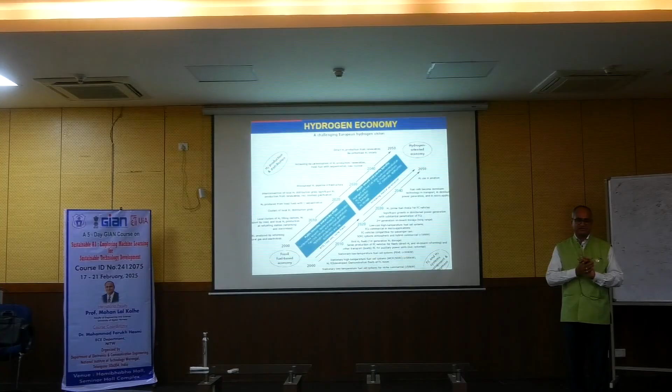With reference to what we were talking about, the hydrogen economy, we have to understand that all the engineering domain knowledge we are studying, we want to integrate for our sustainable development. We have seen that by 2050, most developed countries want to be carbon neutral. So to become carbon neutral, to have a decarbonized hydrogen society, we need to replace hydrocarbons by using hydrogen energy. That is a very interesting point.

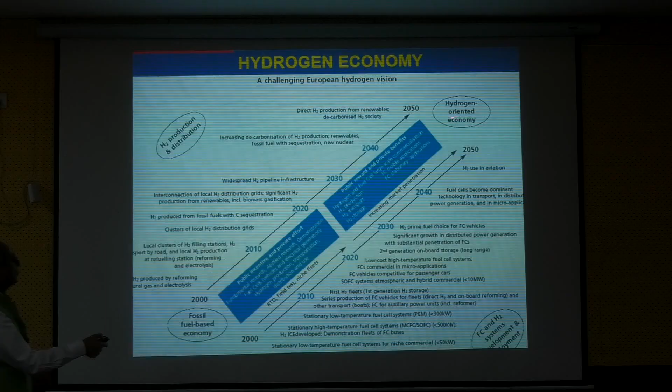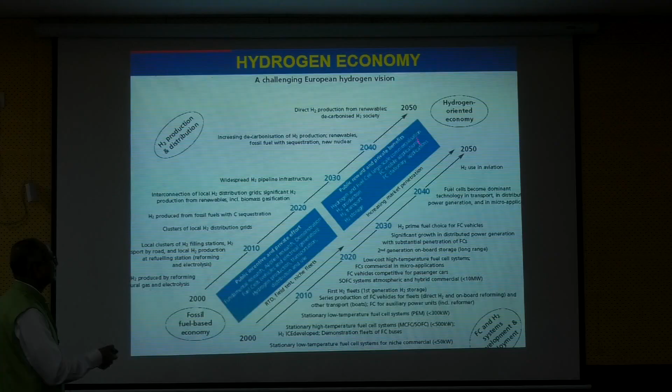We want to move towards a hydrogen-oriented economy, and this hydrogen comes from renewable energy sources. At this moment, let's say we are somewhere here with a fossil fuel based economy, and slowly we are moving to replace this using clean energy technology. At 2030, most countries have agreed that we have to increase our renewable capacity by three times. So we need more sustainable technologies, and they are going to contribute for the decarbonized society through hydrogen, as we were discussing in the last lecture. Now you might have a high level overview of why this is important from the engineering perspective, considering the multidisciplinary perspective, when we want to move towards the hydrogen-oriented economy for a decarbonized hydrogen society.

Very shortly, what we discussed in the last class about the algorithm, I am going to present that algorithm which was in real operation.

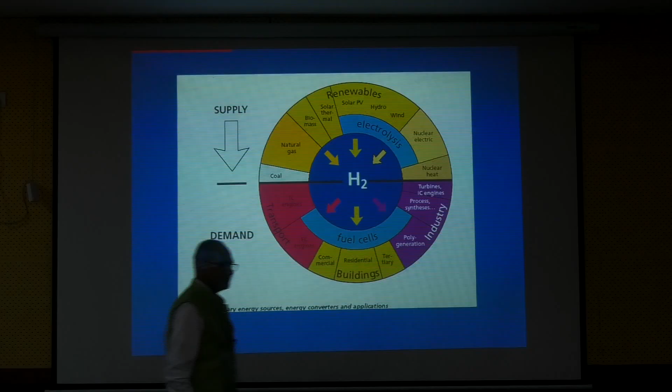This is again a very high level information, and I want to continue yesterday's lecture today also, so you can have a good idea in integrating the domain knowledge. In yesterday's lecture, we focused on making hydrogen an energy carrier. At this moment, our hydrogen is mainly coming from this process: hydrocarbon reforming is contributing significantly for hydrogen production at this moment, around 95% of hydrogen is coming from hydrocarbon reforming. But in the previous slide, we saw that we want to make our society decarbonized. To make it decarbonized, we have to replace the hydrocarbon, and hydrogen can be a good energy carrier.

But now we are participating in a course focusing on sustainable technology development. Of course we are trying to learn about machine learning implementation, but first we have to see how these technology developments are happening. To get hydrogen from clean energy sources, those are renewables: solar photovoltaic, hydropower, wind. These are used through the electrolysis process to get electrolytic hydrogen. When using these sources, we do not have any hydrocarbon contribution, so it contributes very effectively towards a zero carbon society. At the same time, in some countries they have nuclear electricity, and that can also be used, along with the heat taken as a byproduct from the nuclear power plant, or maybe solar thermal, for reforming biomass. Overall, the objective, as discussed in the last lecture, is making hydrogen an energy carrier.

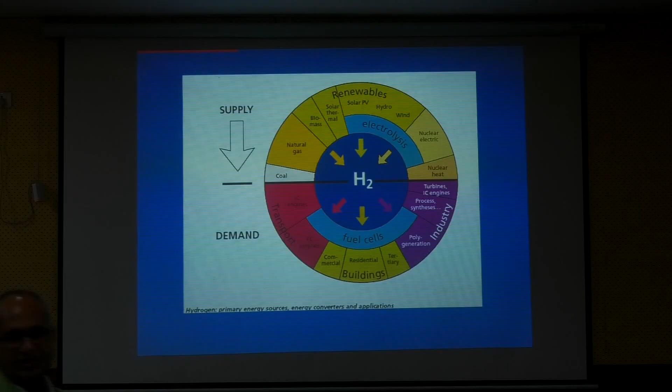We can use hydrogen with some slight modification in internal combustion engines. This is a very interesting point from the engineering domain knowledge perspective. We know that most of our transport sector is based on internal combustion engines using petrol and diesel, which contribute significantly to CO2 emissions. We have to reduce that, and we have to use engineering knowledge for that. With some modification to the internal combustion engine, we can use hydrogen as a fuel.

Last year, I had the opportunity to participate in the European Union Hydrogen Week at Brussels, Belgium, and what I observed is that most of the leading automobile manufacturers of heavy duty vehicles, like Scania, Volvo, and all these big trucks, are modifying their internal combustion engines so they can use hydrogen fuel. So now you see how some points we discussed yesterday are going to be implemented in cooperation with the industry.

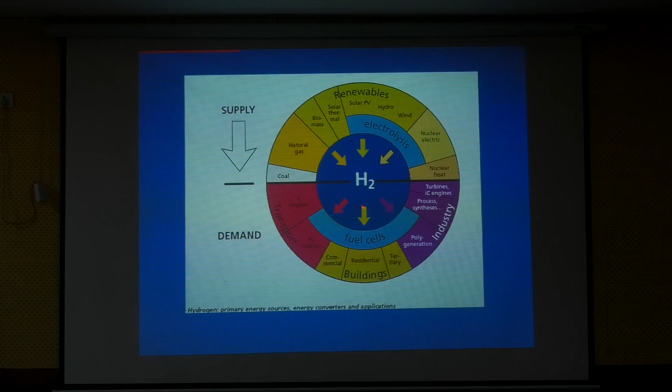Now the next point here - I showed transport sector, but another very interesting point we will focus on is the fuel cell. Many of you are already aware about this electrochemical reaction in fuel cells, and these fuel cells can be used for many applications: transport, stationary application in buildings, and also in industry. Now we will come very soon to the algorithm also.

What I was mentioning yesterday - hydrogen is going to be required mainly for the process industries also. Why? Because we are going to require fertilizers, and fertilizers require ammonia, and for production of ammonia we need hydrogen. So for our sustainability and for our next generation, we need sustainable food, and to get sustainable food we need fertilizers, and for fertilizer we need ammonia, and we can get the green hydrogen through this electrolysis process. So you see how all the things are integrated with each other.

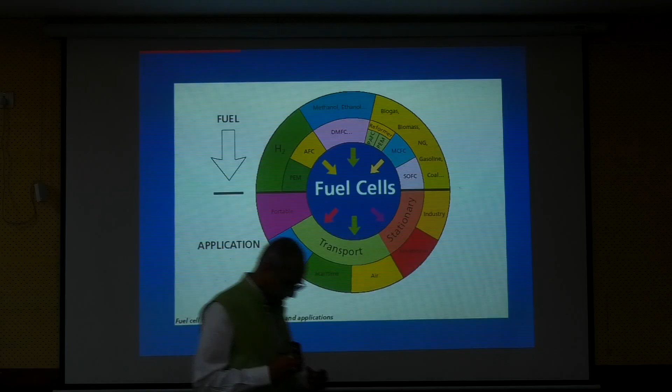This picture provides you some idea about the supply of hydrogen and the demand. If we go to the previous slide, this IC engine technology is a well established technology. Similarly, process industries are also well established technology, but fuel cells are not a well established technology. So how fuel cells are going to contribute in different applications of sustainable technology development, and how we have to control them or use available data for autonomous operation of such systems - that is what we are going to focus on today.

So let's say for your assignment or exercises, if I give you a task to develop an algorithm for such type of systems, I believe that after this lecture you will be in a position to provide me a flow chart of the algorithm. I know we can do a lot of programming, but if you can make a flow chart based on your thinking on paper, that will also be quite good and good learning.

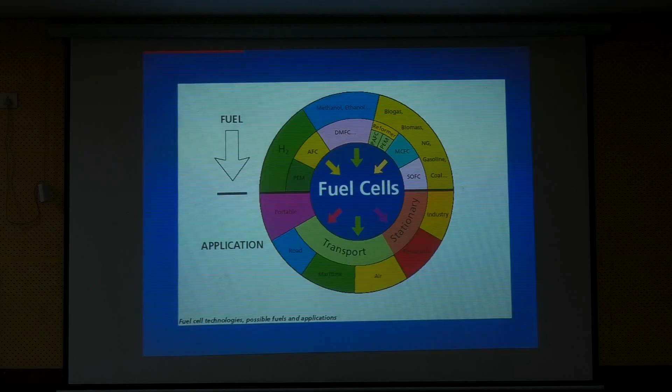Coming back to fuel cells, they can be used in different applications: portable, transport, stationary, and so on. In the transport sector, I mentioned briefly about road, but there's also the maritime sector and the aviation sector. There is big potential here. This was just a high-level overview.

Now coming back to the problems which we are going to face and how we can use our knowledge for that. We have seen how hydrogen is produced, how it's delivered, how it's stored, which type of fuel cells are available, and when we want to integrate them, what type of control algorithms are required. For that we need research and development, and only then can we do technology validation.

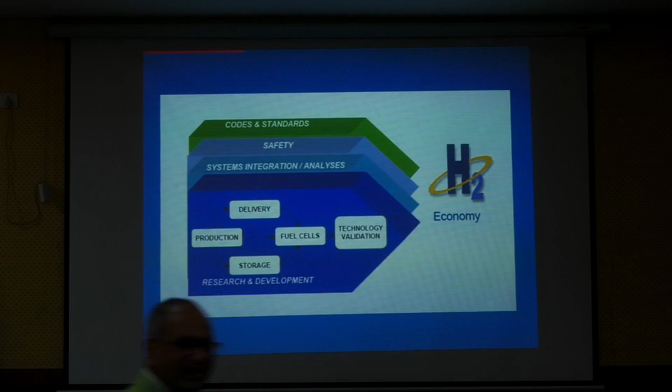Being researchers, you have the opportunity to utilize your domain knowledge if you want to contribute towards the hydrogen economy, maybe in hydrogen production, for example. In green hydrogen production, meaning getting energy from renewable energy sources, you need prediction techniques to estimate how much renewable energy production, maybe from wind turbines or solar photovoltaic systems, is going to be there. Based on the electrochemical characteristics of the electrolyzer, which can be physics-based modeling combined with prediction modeling, you can get an idea about hydrogen production.

I will share with you some papers about the prediction of solar and wind energy. Many of my students worked on this, and in those papers the algorithms and equations are there for you to use. If we put the modeling of the electrolyzer on top of that, we get an idea of how much hydrogen production is going to be there. This shows how you can contribute your engineering knowledge to understanding hydrogen production, which is very important for policy work or planning.

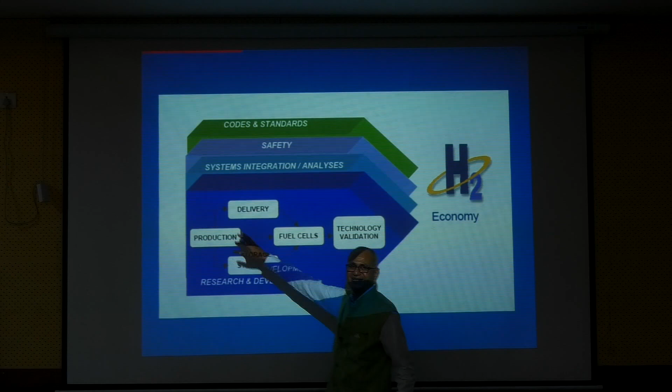After getting an idea of production, we have to see at what rate it's going to be produced. Accordingly, we determine how we're going to store it, how we're going to deliver it, where the application is going to be, and then do the technology validation. Here you can see such a system.

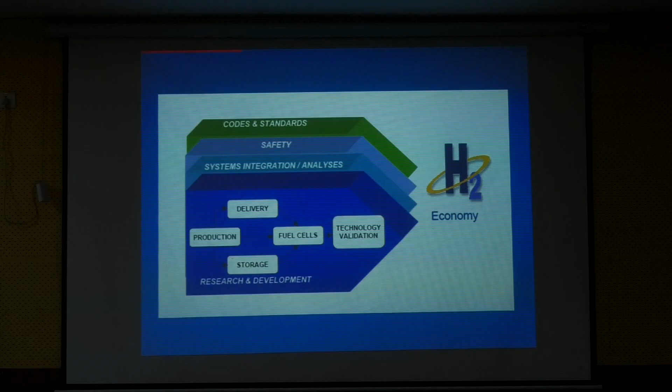When we talk about system integration, different types of electronic components or power conditioning devices will be required. So here you can use your knowledge. Let's say some of you are from an electronics background - you can develop power conditioning devices for specific applications, because for every application the device components we need to design are going to be very different, as I will explain. Your electronic engineering knowledge can be useful for designing system components when we want to do the integration.

Yesterday we discussed safety also, because hydrogen is highly flammable and we have to be very careful. So safety is important, and on top of that we always need standards and codes. Without that we cannot work, right? There are always some standards.

So the codes and standards, then only we can move towards the hydrogen economy. If we are planning to make our society decarbonized by 2050, and we are now in 2025, next 25 years are remaining, there will be a huge number of requirements for engineers who can contribute towards the decarbonized society. So while teaching your students, you have to focus on how the big requirement of engineering professionals for the next 25 years is going to be there, and in which domain.

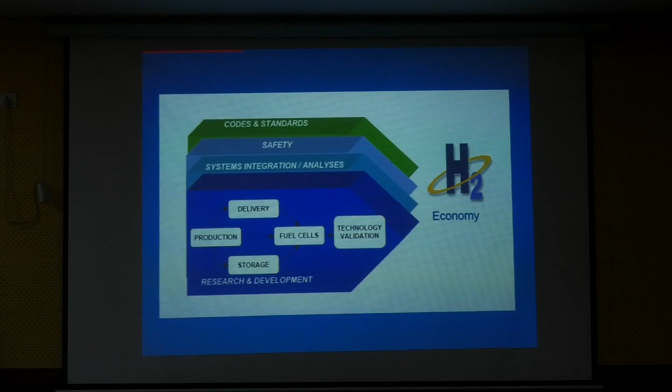That is true. So now you got a little bit of a high level overview about the hydrogen economy and how we can contribute. Now I am going to give you a very specific case about an algorithm, and how that algorithm was developed by me and my team 25 years ago. This is a very interesting and real operational work.

Here you can see that we are integrating renewable energy sources with what objective? With the objective to store the energy in the form of electrolytic hydrogen. It means hydrogen is going to work as an energy carrier. So here I am going to share my experience of working on this project.

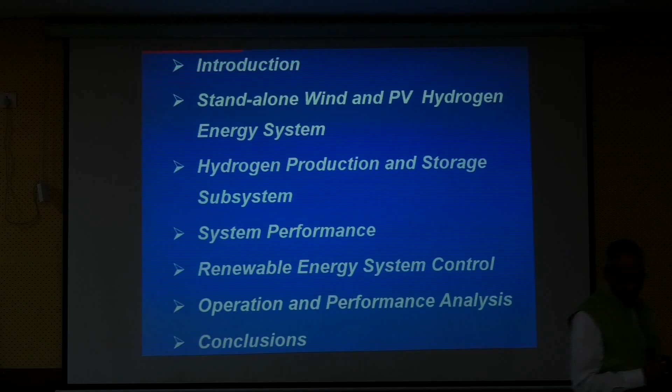I was the lead in this project. We developed two projects of the same kind: one was in Canada and one was in Finland. So in this project, the idea was to use wind turbine and solar photovoltaic sustainable energy technologies.

for storing the energy from these sources in the form of electrolytic hydrogen. We wanted to have such a system that is autonomous and standalone, and for that, how do we need appropriate power conditioning devices and algorithms, and of course the data which we have collected or are going to collect, and how that data can be used for further analysis.

So I am going to present how these renewable energy systems have been integrated with the objective of hydrogen production and storing. And I missed one point, that should be hydrogen utilization also. And then when we are integrating all this system, how it is going to perform based on the control system or algorithm developed and implemented for its operation, followed by operation and performance analysis, and then of course I am going to provide you the conclusion.

This is a very interesting project, and I feel very happy that I did this work maybe around 25 years before, and now we have seen in this hydrogen economy slide that by 2050 our fossil fuel based economy is going to be replaced with a hydrogen based economy. So some of the outcomes from this project are going to be useful for that. I feel very glad that the work me and my team did 25 years before is going to make a significant contribution now.

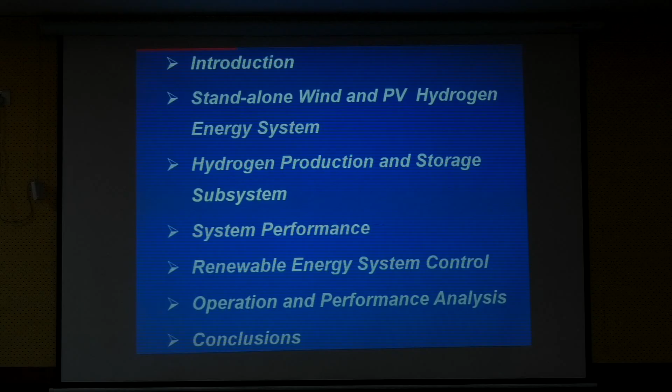Now, the question in your mind may come that we want to store the energy in the form of electrolytic hydrogen, but we can use a battery bank also. So compared to a battery bank, storing the energy in the form of electrolytic hydrogen is going to be more complex than a conventional battery system. That is true.

So what advantages are we going to get? We know that most of the technologies are available in the market, but the big challenge is how we are going to integrate them for such a type of system.

When we want to integrate them in such a system, the expertise of electronic engineering, power engineering, and computer engineering is required, because we need intelligent power conditioning devices which can help us overcome the intermittency or integrate components which have different operational characteristics.

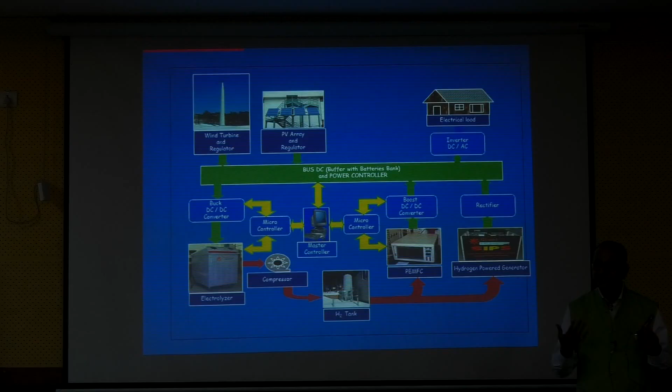So because this was a demonstration project, whenever we want to do the research, we always have to see how we are going to demonstrate the technology and the work to the stakeholders also, which may be general public, policymakers, professional engineers, those who are working on energy policy also, so they can give the idea. They can suppose this type of pilot system is working, then how we can think from the bigger picture.

So that was also the objective behind it, not only to do the academic research in the lab, but to engage the stakeholders and common public, or industries also, so that they can get the knowledge and information of such things, and then accordingly they can think to develop the industry's policy implementation.

Now here this electrolyzer, it was an alkaline electrolyzer. That is again a very important point. I'm not sure how many of you are aware about the different types of electrolyzer. So this is an alkaline electrolyzer, which is a very well established technology, widely used from country to country. This alkaline electrolyzer always needs constant power. Always.

But now technology is changing, market dynamics are changing, new renewable intermittent technologies are coming. So further research work and demonstration work is happening to replace this alkaline electrolyzer by using proton membrane electrolyzer. Some of my students did the work on proton membrane electrolyzer, and that fits very well with the smart grid. I will explain how it is going to fit with the smart grid, because we are trying to use this machine learning for sustainability.

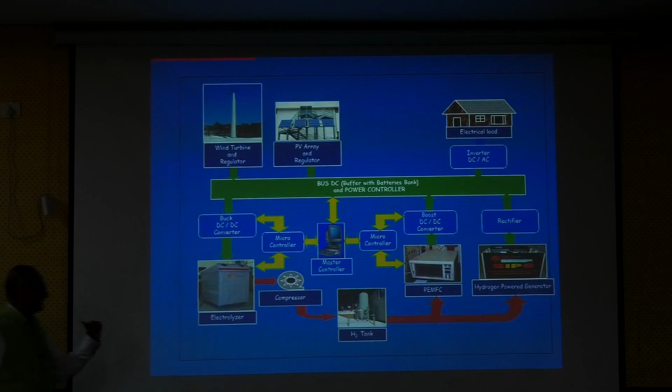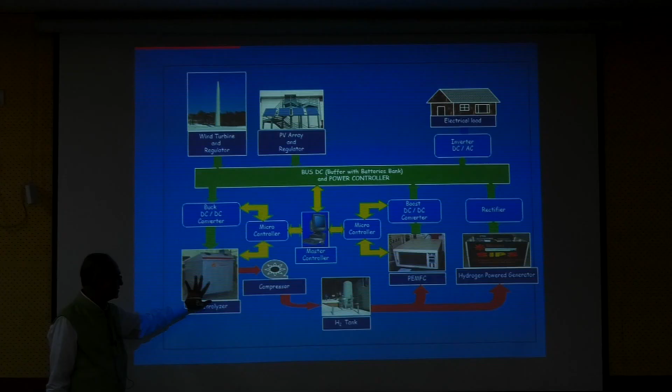So before the break, when we talked about this alkaline electrolyzer which needs to have a constant power supply, but in future, due to the advancement in technology and due to the technical challenges which our network is facing due to the intermittent renewable energy sources, this system component is going to be replaced by using proton exchange membrane electrolyzer. This proton exchange membrane electrolyzer, in place of alkaline, will be in a position to operate under intermittent power supply also. Now here I will put that point with reference to the smart grid.

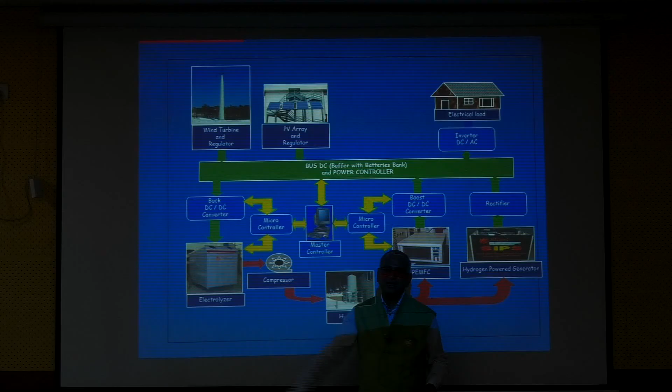In smart grid we are trying to integrate information communication technology together, and also doing the demand side management and energy efficiency. In that condition, if we are going to put in place of alkaline electrolyzer a proton exchange membrane electrolyzer, then that modeling of the proton exchange membrane electrolyzer is going to be very useful for finding out the opportunities for demand side management and conditionally transferring that intermittent renewable energy for producing the electrolytic hydrogen.

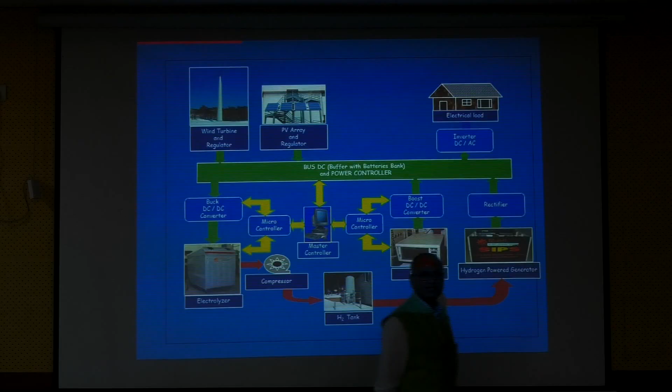Now, we know that this alkaline electrolyzer is operating at atmospheric pressure. When there is a buffer storage tank here, and this buffer storage tank is full, then this compressor starts and compresses the hydrogen at a particular pressure and stores it.

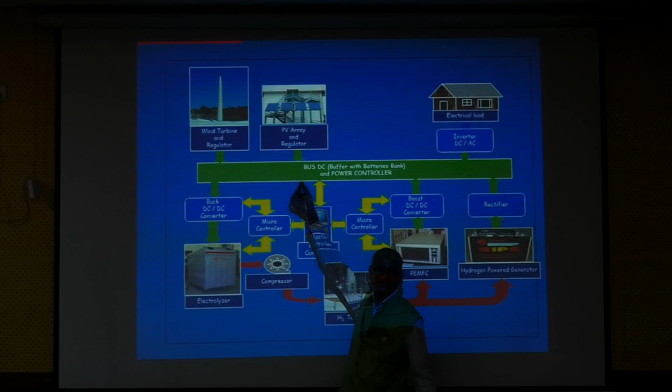The question will come in your mind that this compressor is also going to require energy. That energy is again going to come from the DC bus, and therefore the energy level at the DC bus is going to be fluctuating.

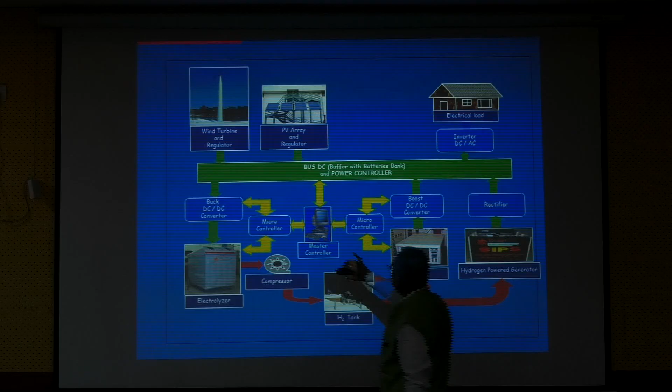It means that the master controller is getting dynamic data with reference to what? With reference to the changing energy level at the DC bus, not only with the consumption of energy into the electrolyzer, but also the consumption of energy into the compressor. At the same time, this master controller is having real time data on wind and solar photovoltaic production, and on the electrical load as well.

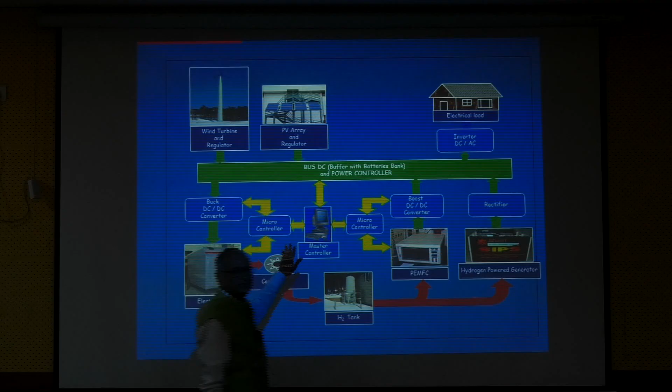This master controller has the duty to predict the wind and photovoltaic production for the next couple of hours, as well as the requirement of the electrical load. Based on that, this master controller can make some decisions, okay, how the energy level at the DC bus is going to change and how the hydrogen production is going to be there.

Now here you can see the beauty of how we are going to integrate prediction techniques in the operation of such a sustainable energy system, in which we want to make it completely carbon neutral from the process point of view.

So it means that the input is carbon neutral. Of course, for the production of those equipment there may be some carbon process also, but we are not talking about the life cycle process. We are talking only from the operation process point of view.

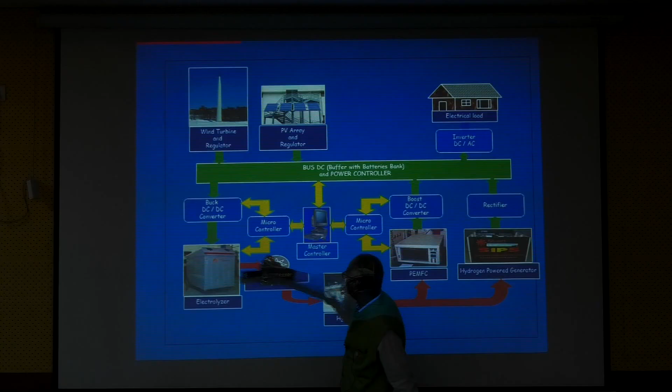So from the operation process point of view, taking a typical example of this one, you can see how this machine learning based prediction technique, which we need to implement here and here, and then getting here, and based on that the load is going to be here, hydrogen is going to be produced, and the energy level at the DC bus is going to change, so we need to predict.

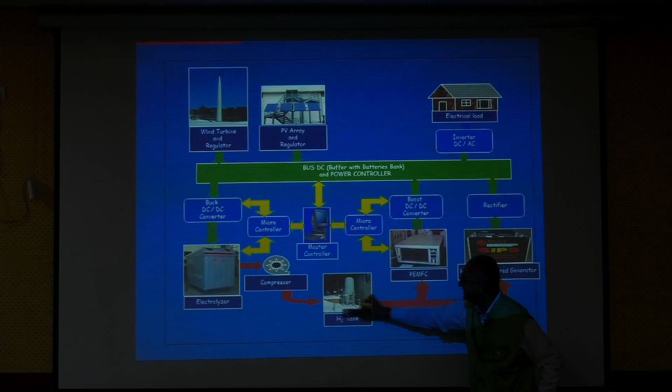So based on the energy level at the DC bus, what are we predicting? Who is going to do that? And then accordingly checking the condition of how much energy is going to be provided to the DC-DC converter, to this microcontroller, but at the same time taking into account the energy consumption at the compressor. We will get the idea at what particular pressure how much capacity of hydrogen is going to be stored for the next 1 hour, 2 hours, or 1 day or 2 days. Is it okay? So that's really interesting here.

Now we will come from the utilization point of view, because yesterday we discussed this one. But yesterday, due to the time limit and I was also tired, we were not in a position to get complete focus on the control algorithm. But now, with the help of this diagram, you are in a position to understand how the overall algorithm and control system is going to be operating, and how you can use your machine learning techniques for that purpose as well.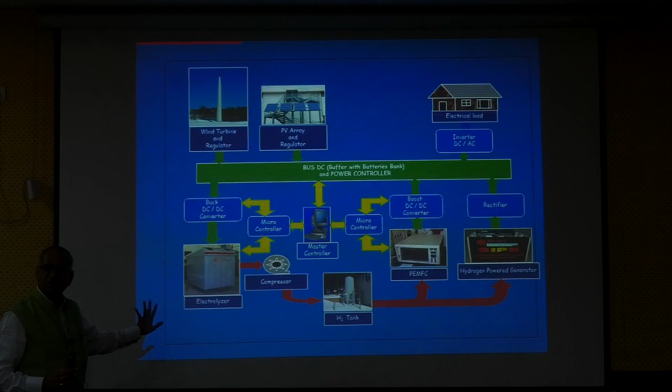And this is a very complicated work, okay? It may even require, if you are interested, one of you can do PhD work on this topic also, because it is a very intensive work.

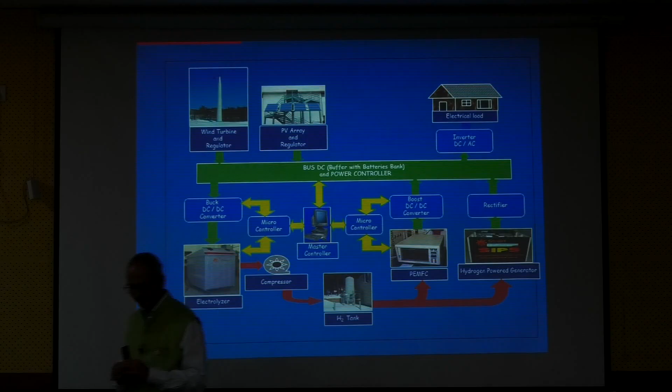Now we will come to this point. We store the energy in the form of electrolytic hydrogen. That electrolytic hydrogen can be used for different applications also. What we have seen before the break, we can use it in the automobile sector, process industries, fuel cell, stationary applications, and so on and so forth.

So when we are doing some project work and demonstrations, we always have some limitations. In this project, the focus was that we have this standalone system with autonomous operation. So we will try to utilize this stored energy in the form of electrolytic hydrogen as a fuel, either into the fuel cell or into the internal combustion engine coupled with an electrical generator.

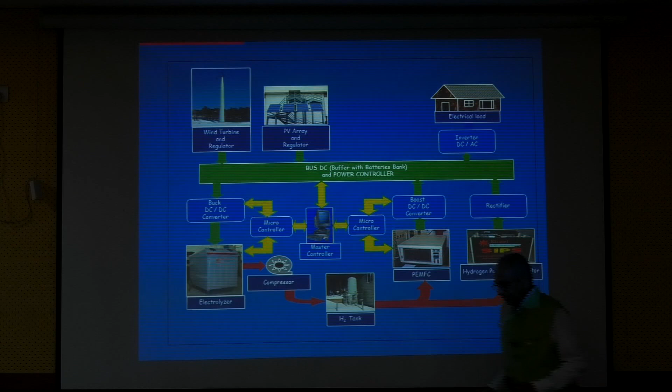So let's focus first on the fuel cell. The fuel cell, again, is an electrochemical device, in which we are going to utilize the stored hydrogen, that is the pure hydrogen, as a fuel also.

So when we have to start the operation of the fuel cell, that again has to be decided by the master controller. So how is this master controller going to make the decision? This master controller is going to make the decision based on some input conditions. So what are those input conditions?

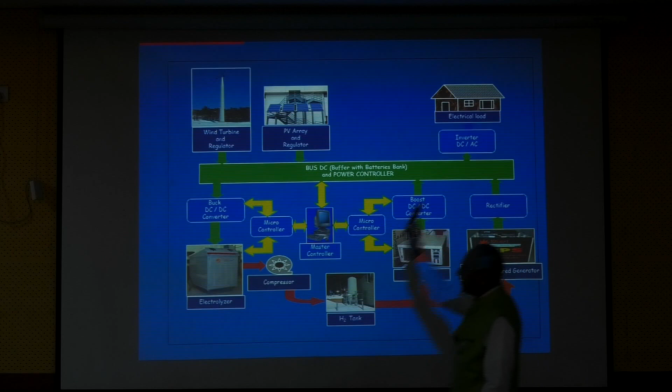How much energy is going to be available from the primary renewable energy sources, how the demand is going to be there, and based on that we have to see how the energy level at the DC bus is. If there is a deficit available with reference to the load, and by defining some strategies of the energy level at the DC bus, it means we don't have excess energy. It means we are not in a position to produce or store it in the form of electrolytic hydrogen.

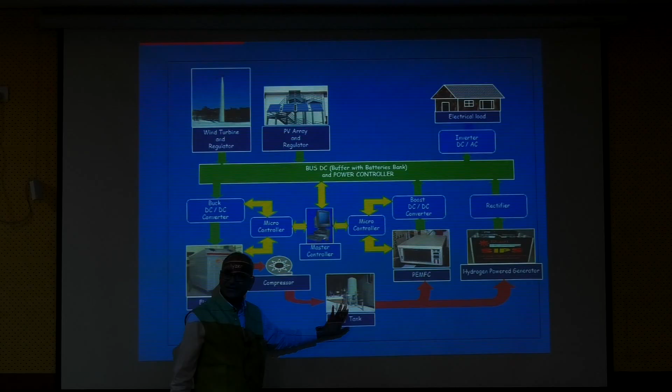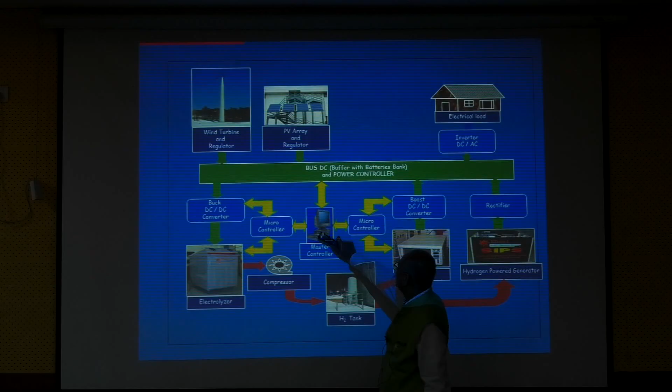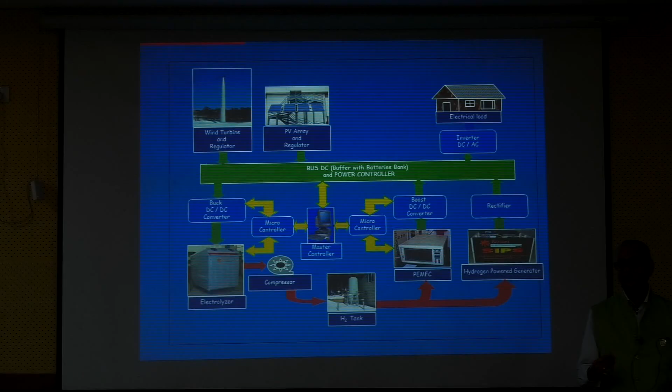It means that now we have the deficit, we have to utilize the stored energy in hydrogen form, for making our system operate in a more sustainable manner by using this stored energy. So based on all these operational parameters, this master controller takes the decision to start the fuel cell operation and provide hydrogen as fuel, to supply power to the load.

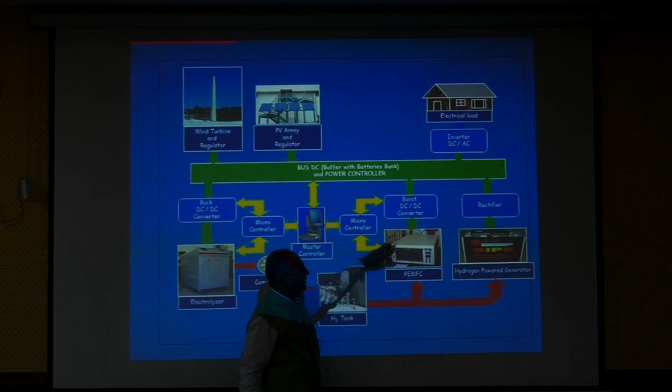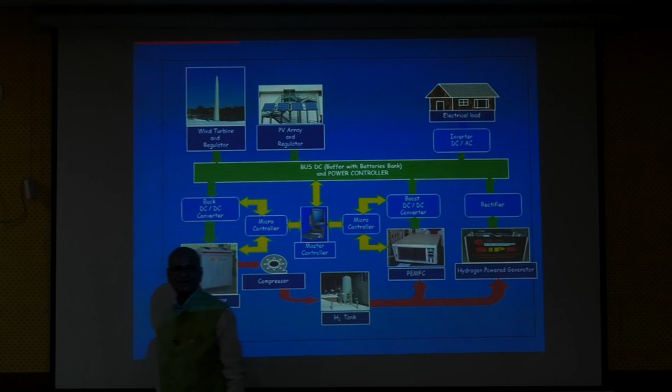And when it is supplying power to the load, because of the deficit, the energy level at the DC bus is also going to change. Then this master controller sends the information to the microcontroller specifically for this fuel cell. The fuel cell is a DC device, we cannot connect it directly, so we need a DC-DC converter here also for filtering. This boost DC-DC converter switching signal has to be controlled, as well as the supply of the fuel, that is the hydrogen, needs to be controlled for fulfilling the load under the deficit condition.

Now, from the standalone operation point of view, see how our algorithm needs to be adjusted. It means at one condition there's excess energy available from renewable energy sources, and in the second condition there's a deficit of energy available from renewable energy sources with reference to the load, taking into account the energy level at the DC bus. Based on that, the algorithm has to take the decision, and then accordingly start the operation of the fuel cell, providing the supply to fulfill the load under the dynamic condition. So this is a very interesting and dynamic work.

In this type of work, we can make the decision by taking the real-time power approach also. But here we have focused on the energy level at the DC bus. It means the decisions are going to be based on energy, not on power. So when we are going to make the decision based on the energy level, we need to implement prediction techniques because time is involved.

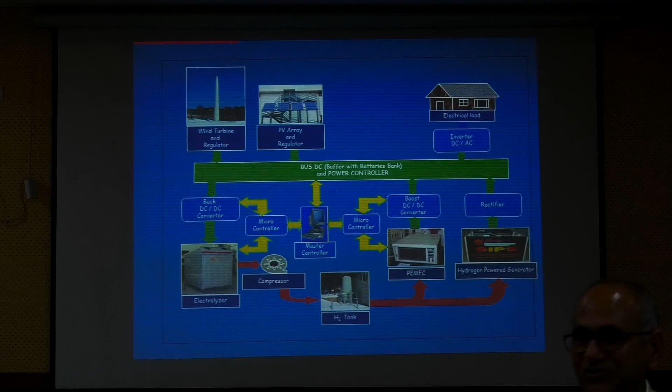Now, to get that 15-minute or 1-hour-ahead information, we can use any technique. Statistical techniques we can use for prediction conventionally, but now we can also use artificial intelligence techniques. So you can see here how we are doing the marriage between machine learning techniques and sustainable energy technology, so that this marriage remains sustainable.

If there is going to be a problem, then there will be a divergence. We don't want that. We want to have sustainability. So you have to consider those points here. I believe many of you may be quite expert in machine learning techniques and prediction techniques, so you can try to implement them in such type of projects also.

Then another very interesting thing is that this fuel cell technology, what we are looking at here, is still not a very well established technology from the commercial operational point of view. Why is that? Because this is an electrochemical device, and platinum is used as the catalyst in it, and we know that platinum is very expensive. Due to this, the cost is very high.

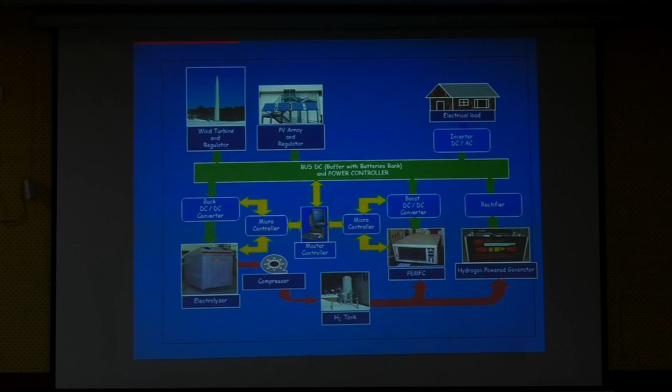Second point: to operate this fuel cell, there are different operational parameters, for example humidification level, moisture content within the membrane, or transferring the hydrogen ion from anode to cathode, and so on. We need to maintain all those things. If we cannot maintain that, our fuel cell will get damaged, and since platinum is used as a catalyst, that will be very expensive. So we can say this technology is still at the learning stage, or at an operational stage to get it more mature. But in place of fuel cell, if we use an internal combustion engine using hydrogen as fuel coupled with an electrical generator, we can do that too. That was the second option of this project.

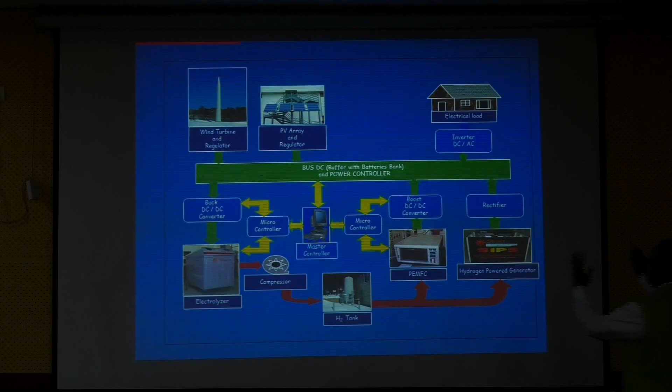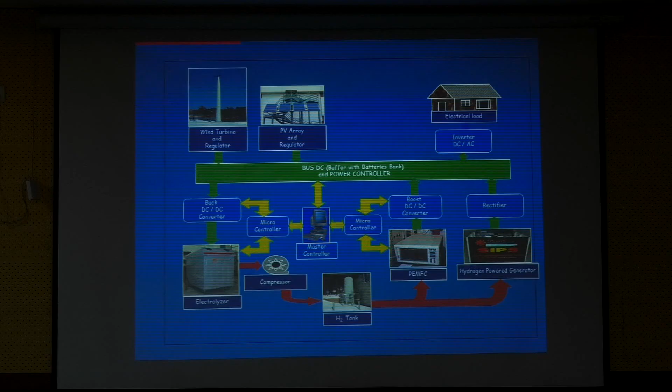This one was the first option, and this one was the second option, but most of the focus of the work was on this part. So this is a very interesting high-level flow chart of this system, which was operational in real time.

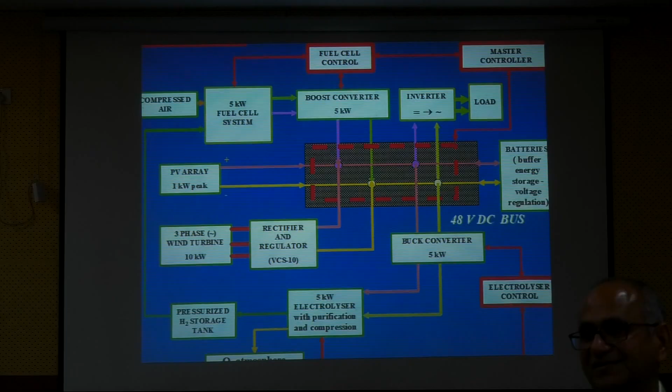Now, some of you might have gotten some idea in your mind. When we are talking about fuel cell as a sustainable technology source, and using hydrogen as fuel here - through your basic engineering chemistry, we know that for the operation of the fuel cell, we need oxygen. Correct? Without oxygen, the process cannot be completed. So here you can see that compressed air has been used as the oxidant in the fuel cell.

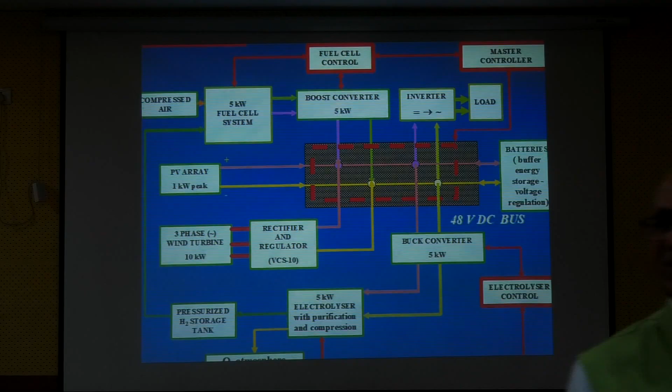But the second condition which may come to mind is that when we do the electrolysis process, hydrogen is produced, and oxygen is also produced - and that oxygen is of really good quality, almost medical quality I can say. So if we capture that oxygen and use it as the oxidant into the fuel cell in place of compressed air, naturally the performance of the fuel cell is going to improve. Very simple - in place of compressed air, if we use pure oxygen as the oxidant, performance will improve.

So now here, considering a machine learning approach, we can predict from the electrolyzer, based on this electrochemical reaction, how much oxygen is going to be produced, and how much quantity of oxygen is going to be required for the fuel cell operation during the deficit of energy in that particular condition.

That is going to be quite interesting to see. Maybe you can give this topic to your students also: suppose you want to use some prediction techniques for predicting how much oxygen is going to be produced by this alkaline electrolyzer under some circumstances.

Of course, we need to define that, and then whether that oxygen produced, in addition to hydrogen, how we can use the oxygen into the system. So you have to think out of the box in utilizing your learning for sustainability. I hope that is clear from this picture.

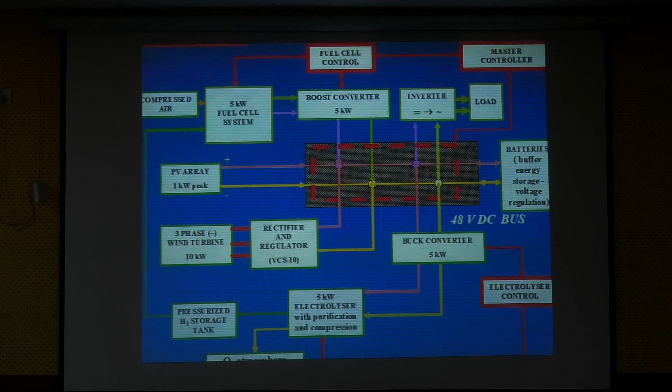That oxygen has been utilized as the oxidant into the fuel cell. And naturally, very simply, anyone can say that the performance of the fuel cell will improve because we are not using compressed air, we are using pure oxygen. So the process will be much more efficient.

Now coming back to this complete picture, I will explain this diagram from the smart grid concept point of view. Smart grid is where we integrate all information communication technologies together with the objective to integrate more intermittent renewable energy sources and make our energy system more sustainable.

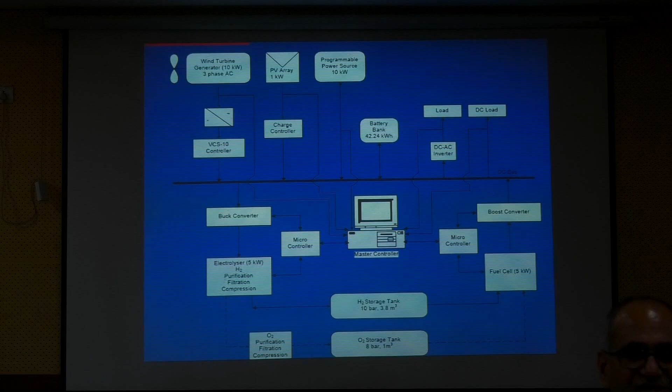Within that, we know active power and frequency fluctuations are there, so active power prediction is going to be very important, and that can be correlated. Conventionally we use statistical methods for this, but now we have advanced techniques like machine learning or regression-based techniques and so on. Based on that, when we get the prediction of the real power, we can see how the fluctuations of frequency are going to be there within the network.

So the fluctuations of power within the network depend on intermittency of renewables, load dynamics and many other things, but we have to maintain the stability of power within the network. By using this droop functionality, physics-based droop functionality, implemented with prediction techniques for developing the controllers of the conventional generators, we know how much input power for the conventional generators is going to be required. This is a very interesting point.

So that is related to the AC microgrid, but here we are talking about the DC microgrid. I will briefly try to explain this here.

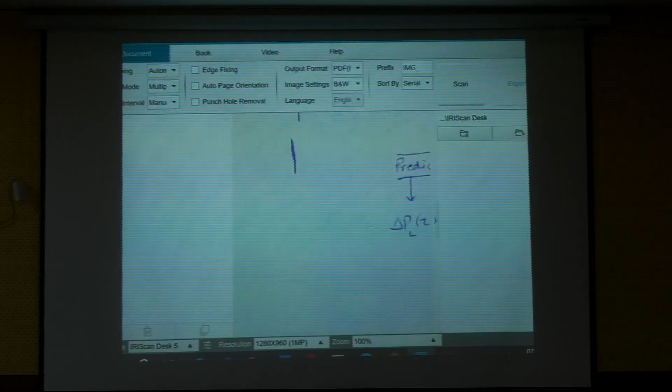When we talk about load dynamics, this load dynamics changes with reference to time, and we can predict it. In your practical classes you are doing some understanding of the prediction technique. Similarly, you can do some prediction of renewable energy also, and see how the variation is going to be there. This prediction you are doing using, let's say, machine learning techniques.

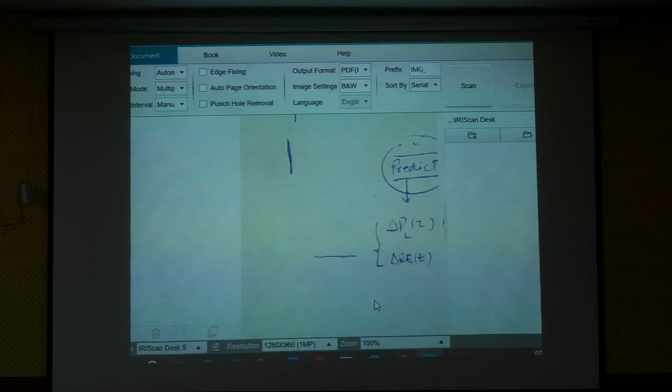So what I was telling you here with reference to the system which we are talking, and I was trying to explain you about AC microgrid approach, and I was trying to explain you regarding the droop functionality.

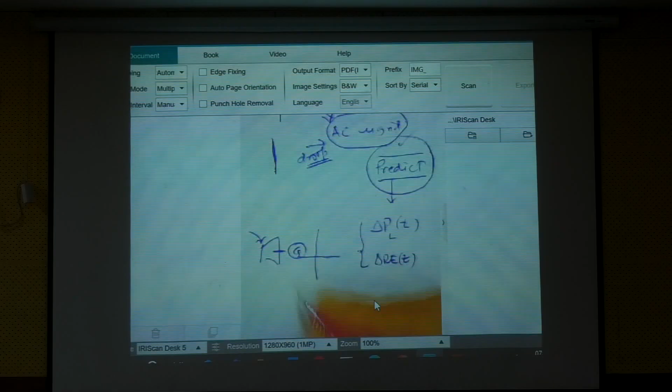Okay, so this droop functionality conventionally is used for changing the input to the turbine, which is basically coupled to the generator, and when this generator is providing the power which is fluctuating with reference to the system.

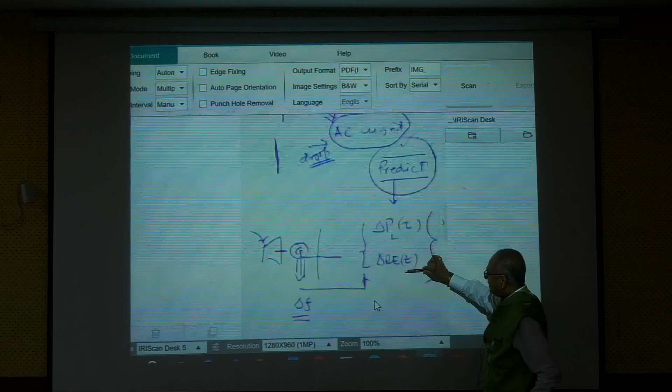So when this power is fluctuating in real time, naturally the real time frequency is going to fluctuate. So here you can use machine learning techniques, statistical techniques, or prediction techniques based on the variation of the load here, and on renewables here, to predict how this change in the frequency is going to be there.

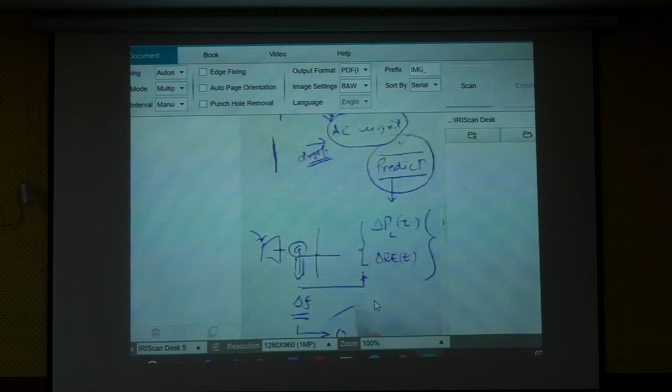And conventionally we want to make this change in the frequency back to 0, right? To bring this frequency back to 0 in a fraction of seconds, we need to have some controller which can control the fluid flow or steam flow of this turbine here.

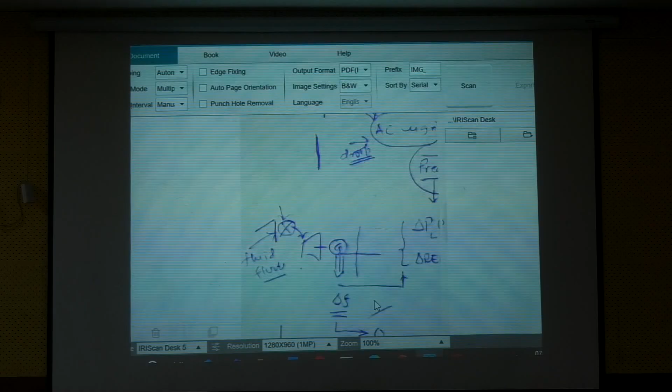So you can see that conventionally we are using this droop functionality. If I take the change in the frequency on this axis and power on this axis, so something like that - this droop functionality will be there. So this is conventional.

So conventionally, this droop functionality is used in the AC microgrid. But now, if we come back on this DC microgrid here, that technique is not going to be used.

So this technique, in my opinion, is going to be the future, especially for decentralized applications like electric vehicle charging stations or maybe for the hydrogen energy system also - this approach or architecture is going to play a major role.

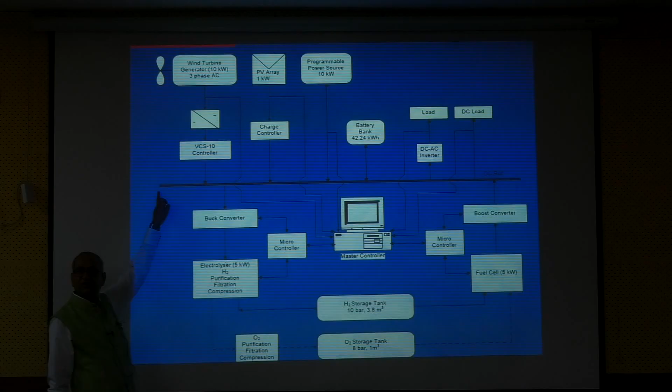In this architecture, here we have the DC bus, here we have voltage sustainability. On the AC microgrid, we took the change in frequency sustainability, or change in frequency to bring it back to a sustainable value - that's what we considered there.

But here in this case, it is going to be the change in voltage on the DC bus. So how that change in the DC bus voltage on this DC microgrid is going to be impacted with reference to the change in renewables input and change in load, okay.

But in this condition, we have taken hydrogen also, so we have to take that electrolyzer as a load also. That's why I mentioned earlier, if you remember correctly, one of my students did modeling on the proton exchange membrane electrolyzer which can operate on the intermittent level.

So that modeling is going to be required, right, for prediction of change in the voltage on the DC bus with reference to all these parameters.

So now you can see how we had to utilize component-based modeling together for predicting, in this case especially, the voltage at the DC bus. Is it okay?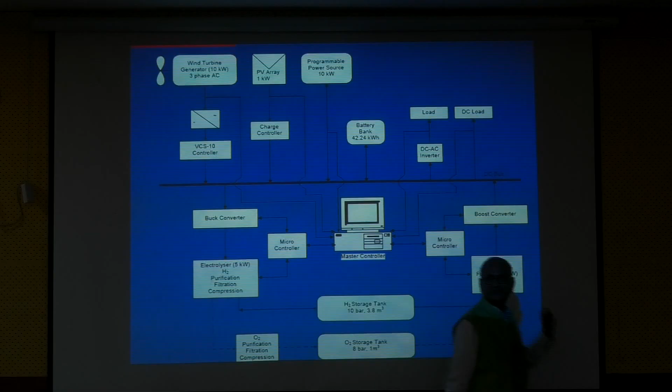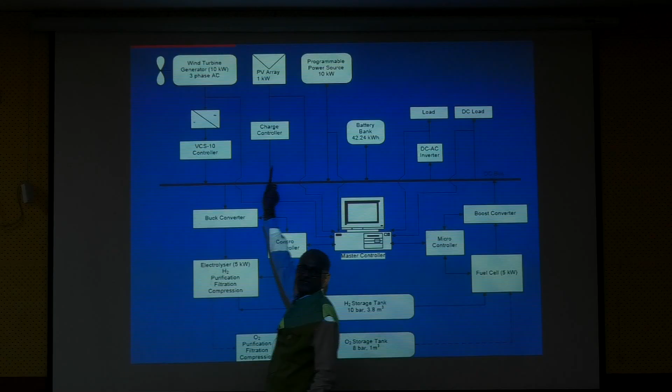Compared to the previous slide, what we have seen here is a new change: capturing the oxygen, storing it, utilizing it in the fuel cell, and producing the required electrical energy during a particular time period, till it reaches a certain amount of energy level at the DC bus, taking into account the variation or prediction of the renewable and the load also.

And we have to consider that this is not a simulation work, it was real experimental work in which the control system or algorithm we discussed today and in yesterday's lecture was implemented.

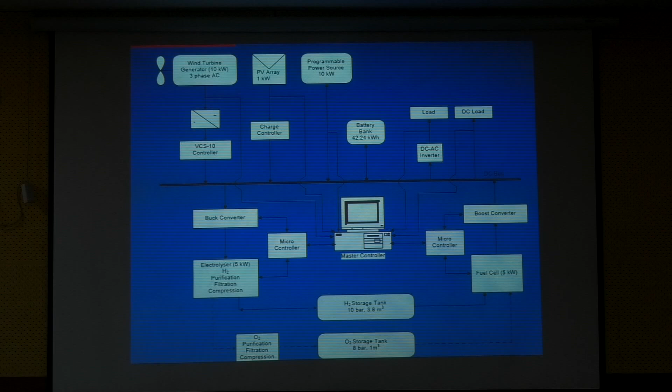The next point which may come in your mind: if nature is not favoring us and we want to test this system as a test bench, how are we going to do that? Because sometimes nature may not favor us, we don't have wind, we don't have solar photovoltaic. To overcome that, a programmable power source has been used. This programmable power source is very important.

In this programmable power source, based on taking into account the available energy resources at a particular location, we can do the prediction, and based on that prediction we can do some programming in the programmable power source. In place of the wind turbine and photovoltaic, we can operate this system by using any type of intermittent supply which we have predicted for a particular location, and then test the operation of such a system.

At the same time, we can also use the programmable load for testing the operation of such a system under different dynamic conditions. Is it okay?

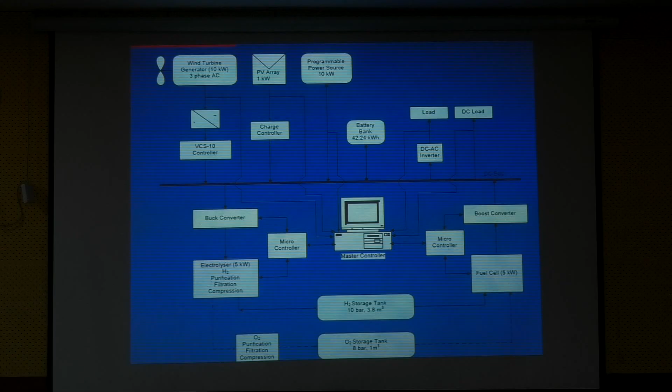Now in media and everywhere you might have noticed that all these leading industrialists are starting big plants for producing hydrogen, not only in India but all over the world. And of course, geopolitics also plays a major role in that. Is it okay?

Now, moving forward, this slide is going to provide you the specific components of the system we discussed: wind turbine, 10 kilowatt, 3-phase permanent magnet synchronous generator; photovoltaic array, small capacity 1 kilowatt peak; electrolyzer, 5 kilowatt alkaline; and to connect the electrolyzer to the DC bus, a buck converter having peak capacity of 5 kilowatt, electrolyzer alkaline operating at atmospheric pressure including compressor.

Similarly, the fuel cell was a proton exchange membrane fuel cell, 5 kilowatt capacity manufactured by Ballard. To integrate that, a boost converter with PWM switching signals, capacity 5 kilowatt. The fuel cell operating voltage was 24, DC bus voltage was 48, so we had to design that boost converter based on that 5 kilowatt range.

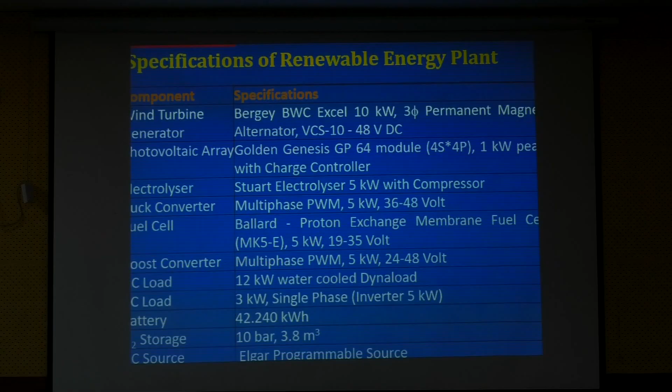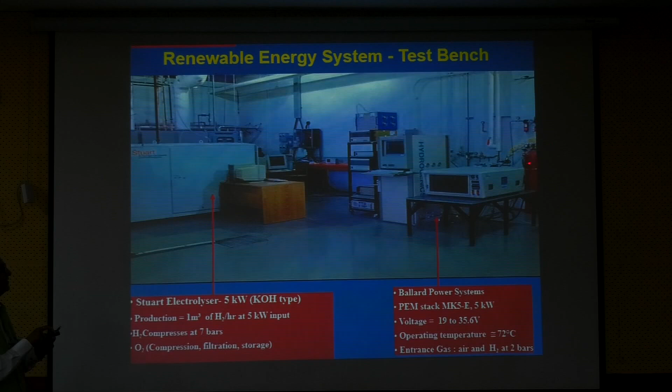Similarly, here for the fuel cell, this microcontroller computer works for controlling the fuel cell operation. Here it was compressed air in the first stage, and hydrogen as a fuel - it should not be within the lab, it was outside of the lab, because we had to take into account health and safety conditions. Then in this master controller there is a lot of information coming from hydrogen detector sensors also.

If there is any leakage or something like that, these hydrogen detectors can stop the operation via the main controller, or shut down the plant basically. And of course, the electrical fixtures or electrical installations within such a lab should be flame proof, not having any spark or anything, otherwise there may be fire risk, because we never know, and health and safety should be top priority.

If we never know when there's a fault, the complete roof of the lab is designed to open, so the hydrogen will go immediately to the atmosphere. If we do combustion analysis of hydrogen using CFD modeling, one can see that hydrogen flame goes straight up, not sideways. That's also a good part, because for CFD analysis we need good computing engineering background too, which is very interesting.

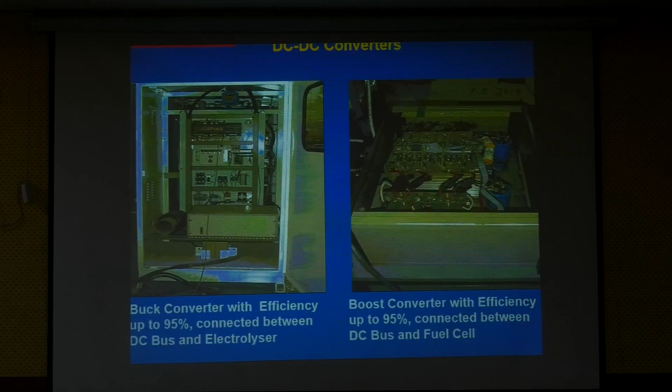Under this intermittent data set, how such type of systems are going to work - I believe your objective is to get more understanding about machine learning, and for machine learning you need data, and for that you need specific cases. Here the specific cases are sustainable technology.

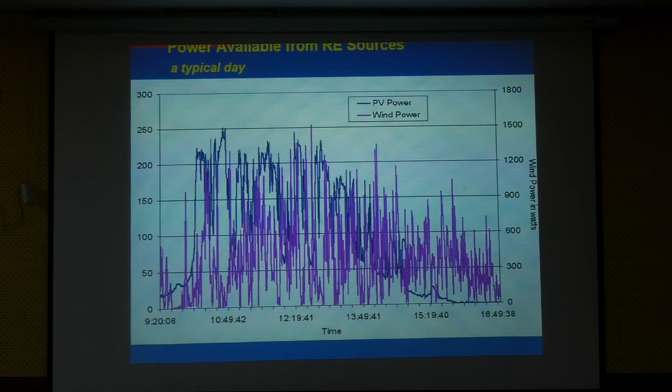Using some prediction techniques, one can predict maybe 10 minutes or 15 minutes ahead for this wind and PV. But here I am just giving you the real operational data. When this real operational intermittent input is given to the system I described, with all the different components you've seen now...

Our objective was hydrogen production. Then of course when we have the deficit, we have to do hydrogen consumption also. So here you can see this is giving us the hydrogen.

Now based on the previous values we've seen on the previous slides, these are the real data, but you can use this data for doing prediction of the hydrogen we're going to require. That prediction of hydrogen production is going to be very useful for making planning for the main controller also, how we have to operate the electrolyzer and fuel cell, how the energy level at the DC bus is going to change, and so on.

Not only that, how much energy consumption there is going to be by the electrolyzer. So here, with reference to hydrogen production, you can see how the electrolyzer input power is also there, and the renewable power combined between both wind and photovoltaic. That's how it is. So you got the idea now of how such systems are going to operate under intermittent conditions.

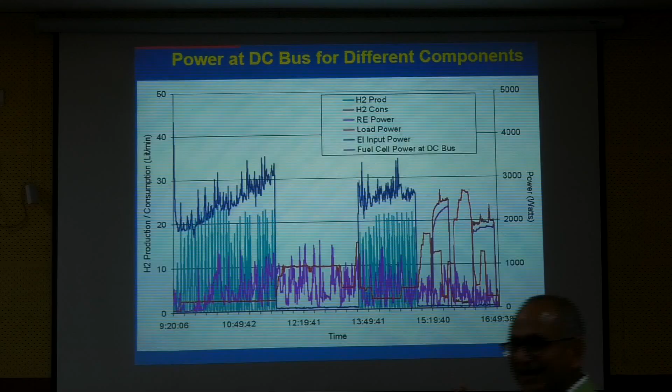Under these intermittent conditions, of course, load is also going to play a role. Here you can see load fluctuations are also provided. And one more thing which might have come to your mind - hydrogen production should be continuous, so why are there transients or regular transients?

It might have come to your mind why the regular transients are there. Those regular transients are due to the compression, because the hydrogen flow meter was after the compression, and the compression is again consuming energy at a particular interval when the buffer storage tank is full. So you see how complicated it's going to be.

So it's not that easy for a human operator to operate such a system. We need to have autonomous operation. For that, our control algorithm, which we discussed earlier, should operate properly. Otherwise, the system is going to fail, and here you see how the intermittency is there.

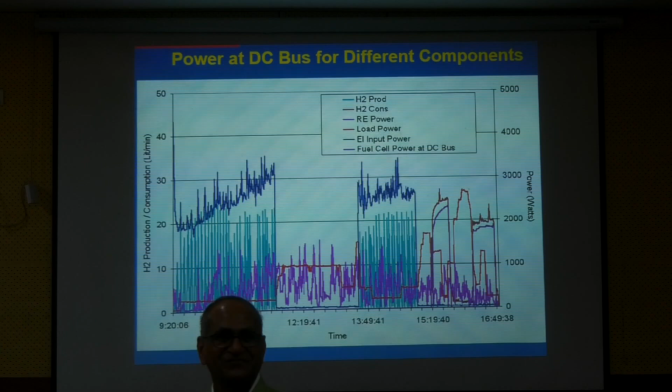So there are a lot of things which I can discuss on this project, and the results from this project are highly recognized. They have been published widely, not only in the IEEE transactions but in IEEE societies also, including the International Energy Agency, and this work has been highly cited.

And I am quite pleased that some of the work which me and my team did, let's say 25 years before, is going to be very useful for this hydrogen economy. Now the Indian government is also planning, and every state is making their plan to have more and more green hydrogen production, due to the geopolitical situation, or maybe commitment to the sustainable development goals, or commitment towards net zero, or whatever there is.

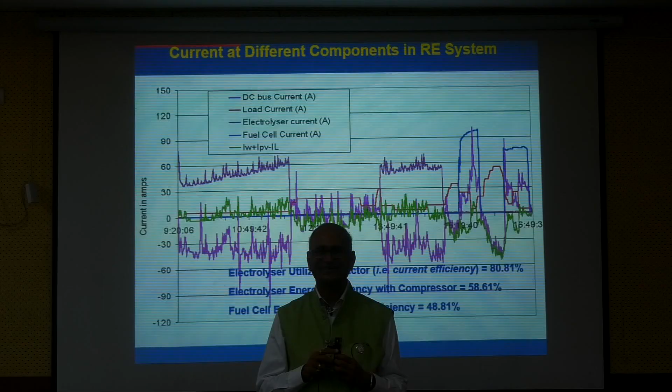On the external impact of the factor also, meteorological parameters, some of my students did the work on this one also. So I will share, because we have limited time and I also get tired, but I will share those research articles with you, and then when you have free time, you can go through them also.